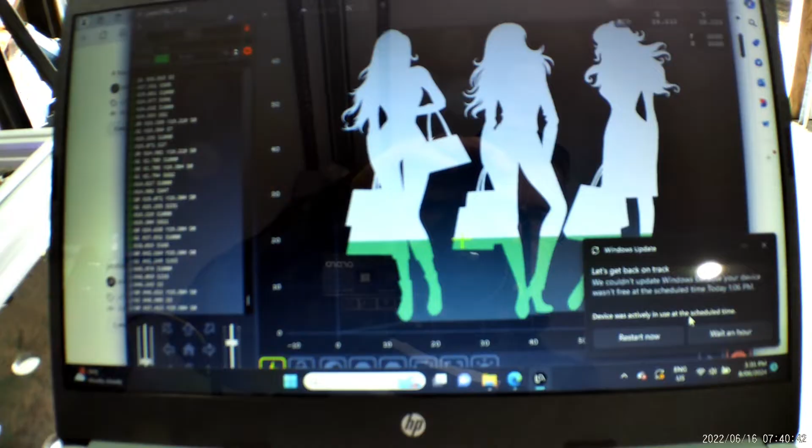It's just printing a picture there now, burning it into a bit of paper. As you can see, it's burning through the paper, but that's working so far. There you go, you can see what it's actually printing down there, that picture there. You can see the green line where it's up to, it's pretty much just finished printing their legs.

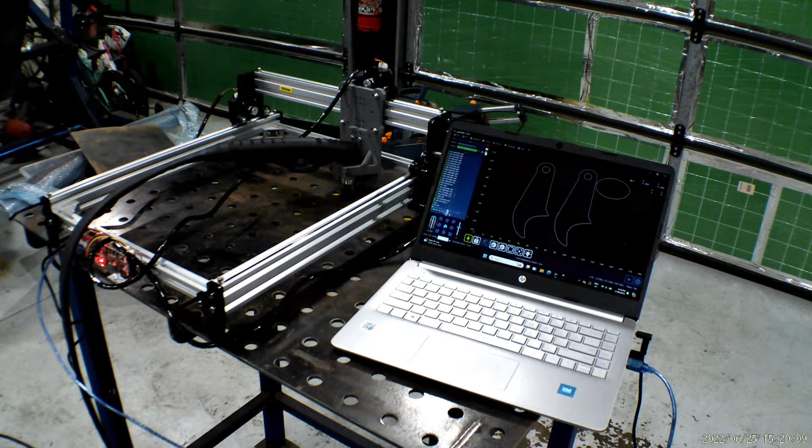So I guess, righto, what we've done here is set up the new bracket arrangement for the plasma attachment to the router, the CNC engraver. What we've done, and I got Nick Rimmer to make it work, he pretty much copied this original bracket which held the laser on, this bracket here, and using his AutoCAD and 3D printing skills, he printed me this thing.

So what this allows me to do is, the old laser, I'll find that here somewhere. The old laser attachment was this, and it used to bolt onto the front of this thing and connect right at the front here, and it shot the laser down to the material you're going to engrave. That's pretty much how it used to fit together.

So what he did was extend it down, so if I want to actually mount that laser down low, I could put this on. I could take this plasma attachment off and mount it down low. He made the mounting bracket for me, which fits onto my x-axis and y-axis. So what he did was, I drew up on here the size I needed for the laser attachment.

And you'll see this thing will start printing what I need it to print now - not printing, start engraving, plasma cutting, but I've got the plasma turned off at the moment, so I'm just trying to get this thing working. I'll turn it off just so I can finish what I was saying, I didn't mean to actually turn it on. Yes, I want to abort that.

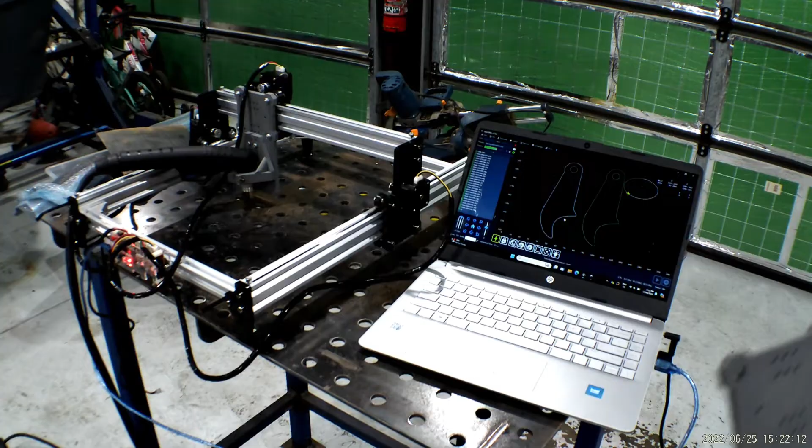So yeah, what it allowed me to do was - I'll just turn this camera around so I can see. That's no good, I'll turn to the back here. So what it allowed me to do was, instead of having the actual laser mounted up high here on a short mounting board, I can mount it down lower.

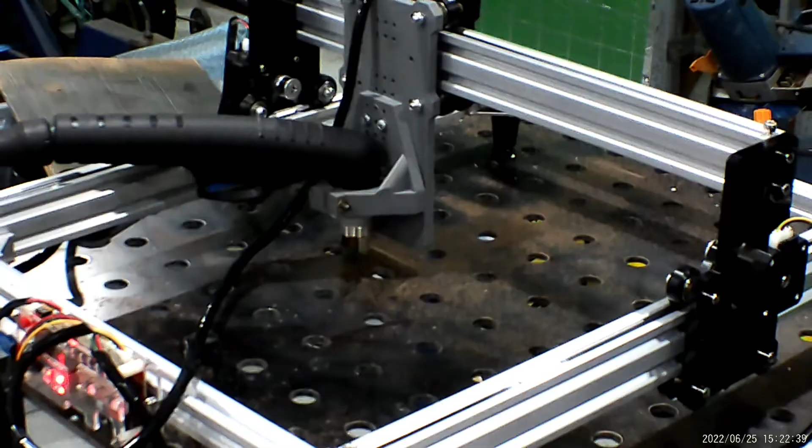But that plasma attachment you can see over there, let me just swing that around. I just drew that up, got him to modify it and make it for me. See that bracket there? It just mounts onto this printed board. This is just a plastic board at the moment, and all we're doing is proving that the concept works. I made this mounting bracket, which has a 32mm hole, which mounts my plasma torch straight into the top of it.

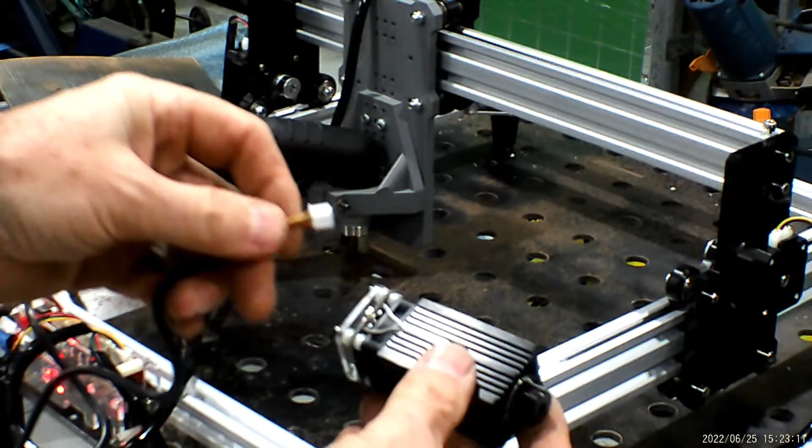And then, like I said, I haven't got the laser attached at the moment. Here's the laser plug, if I plug this into this little laser here, it'll put the laser at the end of it. I don't want to use that laser, all I want is the plasma to run. That's just crossed over at the moment, plug that back in.

So what I'll do now is I'll show you how this actually runs. I'll just bring this around over here somewhere so you can see, you'll be able to see what's on this screen here.

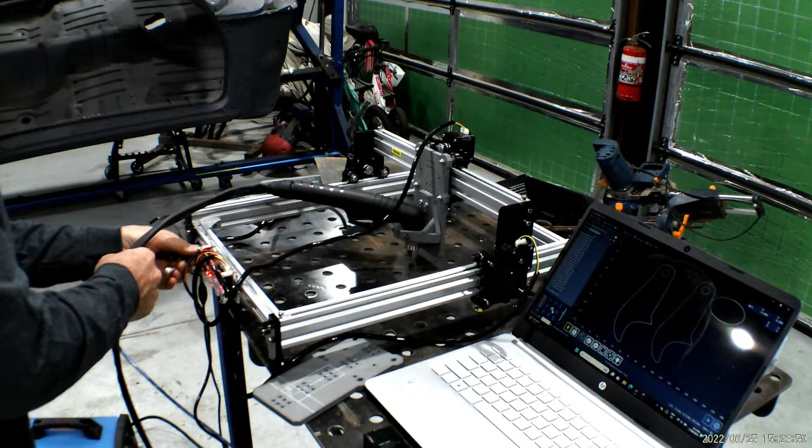I'll stop the job and start it again. Just got to be careful. At the moment I've got nothing holding my plasma torch sort of lead wire up, so I kind of got to hold it here out of the way by hand. So at the moment you can see that job that I've got on the screen there.

Just a couple of brackets I just made up myself there. I forgot to home it down there, so you'll see now it'll actually move out to its right position. It won't get jammed on things that it was getting jammed on before. There you go, it's cut those two holes out first, it's followed that path. And you can see the little cursor down here following around.

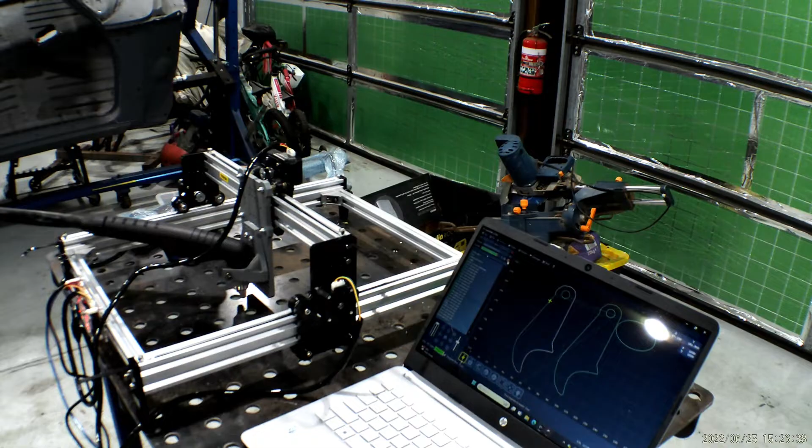So if I can get this thing working with my plasma torch, I've got to get a little catenary made for here, so this cable's out of the way. I've got a little catenary made for the side here to hold these drag cables here. But as you can see, it'll follow the path of a bracket that I want to get made, or a double bracket, like I said, and just a plain hole in the plate.

Hopefully you can see that a bit easier if I take that away. So it's saying now it's cut that, right? What I've got to do next is I've got to work out where this trigger wire goes from the laser down to my plasma torch, which is down here, my plasma cutter.

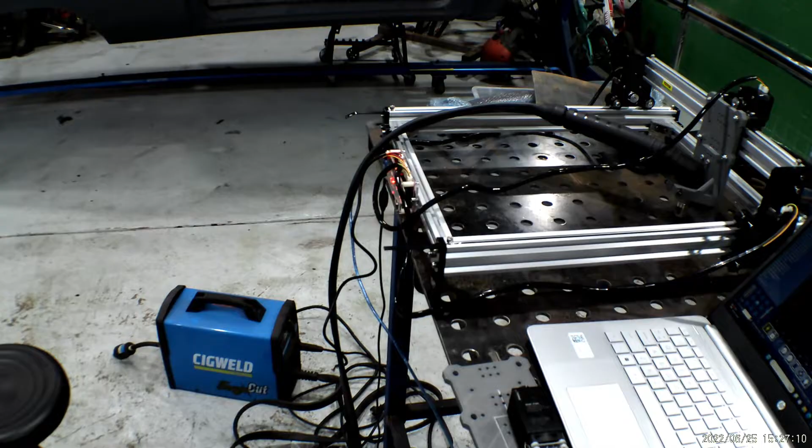It's an easy cut CIGWELD. It's an easy cut 35. So what I've got to do is I've got to work out how to disconnect this end.

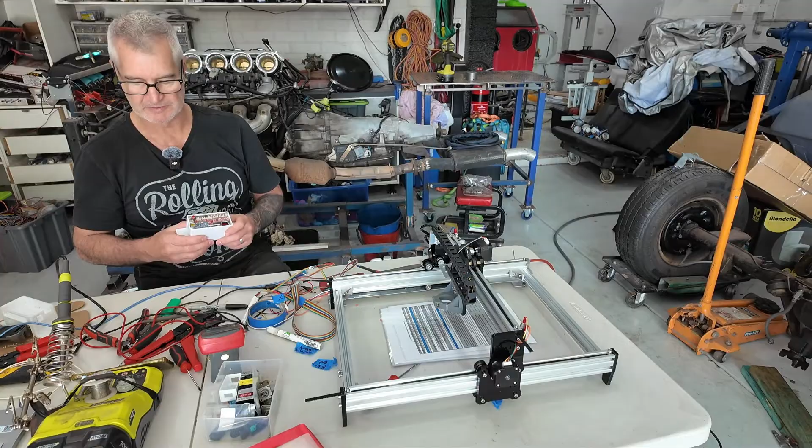As I described previously, we've got a small CNC laser engraver. What we did was I took off the laser attachment and I had a bracket made up to hold my plasma torch, fitted a small catenary to it. I'll show you that in a second. Hopefully I can get that to move over there. I'll do that in a sec. Let me just see if I can make this fit there. There you go, there's the small CNC plasma cutter we've made up.

What we did was we fitted these catenaries on here, so you can see as it runs now, the little catenary runs around with the little cable chain, runs around with all the wires in it. Same on the long travel, so you can see the long travel moves back and forward here.

So what I've done here is I've extended the cable from my plasma torch, or plasma cutter. This is the original plug that used to go to the laser. So when this little computer used to trigger the laser, it used to turn this on and power it up. So I'll plug that back in there.

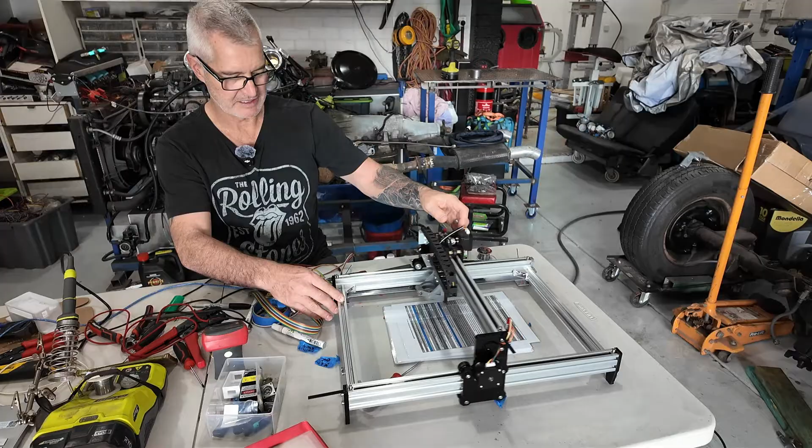I have this plug here, which is all my limits that I have on here. So each one of these axes has a limit on it, on the X and Y axis, on the long travel or cross travel, whatever you want to call it. So this runs down to the end here, you'll hear it hit the limit. Hopefully you hear that click off. Same the other end, and now they're a hard limit.

So there's a certain parameter you have to set up so this thing knows the size of the table that it's cutting, and the hard limit is there as a safety factor. So if it runs too far, it actually hits it and trips it out.

So I just need to plug in all these, these are the stepper motor drives. So there's 3 stepper motors on this. There's 2 long travel or Y-axis, and there's 1 cross or X-axis on here. So I'll just plug these into where they've got to go. Hopefully they're all the same plug. I marked them, so hopefully I've got this one marked as X. So hopefully they're all correct. Plug the limits in.

So there's the limits plugged in there as well. I use this ribbon cable - had one of the guys I know fit the plug up to me with the ribbon cable, and then I just spliced off as much as I needed on the end of it here. I could have cut it a bit shorter, and probably will. I'll cut them in and tee them in right next to the catenary or cable vey when I get some time. But for now, I've just soldered all the joints in here to make it right.

This also has a power supply which plugs in the side here, which comes from 240 volt mains, and it has the little connector that comes from the laptop. So that's that part - I'll turn the power on.

Logged in there, and what I'm currently using is laser GRBL, which came with this small Vivo brand laser cutter. At the moment, what I'm going to do is power this laser up.

I'll power this machine up and do a test cut on it. So I'm going to load up a file here - it's just a small bracket file that I made up. It says create, so it turns it into a G-code file, and the picture's up on the screen there.

I turn on my plasma cutter. That's on. At the moment, the plasma torch is just sitting here - not 100% sure just yet, but I think because this is a high-frequency pilot arc plasma cutter, at the moment I've disabled the trigger.

This cable here runs into the back of my plasma cutter down there, and I'll show you what I've done. It runs down - I drilled a hole in the back of the plasma cutter, put a 4-pin connector on the back of the box, and what I did was I wired in one of these little relays.

The signal that used to come out of this cable here used to go into the laser. Now it has DC active, DC plus, DC minus, DC active or neutral, and the trigger wire, which is the signal wire. So those 3 wires you can see here - black, red, and yellow - we've got red as the DC, black as DC minus or negative, and the yellow cable is the signal.

Righto, let's give this thing a bit of a test hit, see what it does. Start from the beginning. Stay over there, Han. Stay over that side.

I tripped the power out, I tripped the circuit breaker. Okay, so I tripped the power on me. I had the plasma cutter plugged into the power board and it tripped it out, so now it's plugged straight into the mains. Let's see if I can make this resume cutting, or if I have to start again.

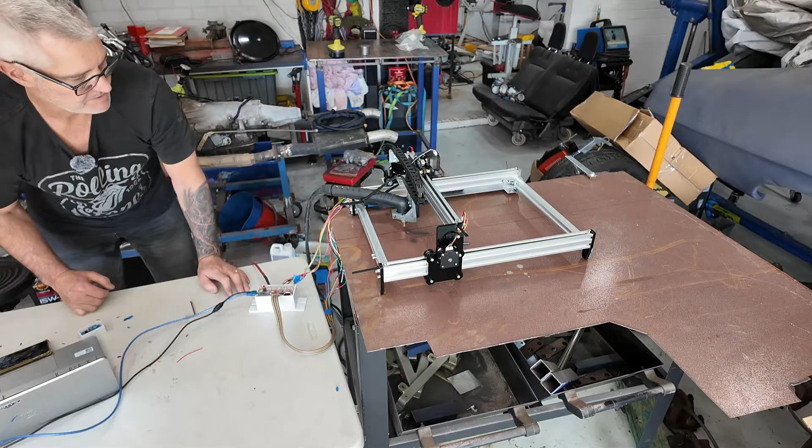Alright, what happened then was I stopped it, because what happened was it hit the side here and it moved the torch up away from the steel. I broke the plasma bracket here. I don't know if you can see it in there. The bracket right there snapped.

I over tightened the screw, so I'm trying to hold it in position just for this test run with this cable tie holding it up. I'll see if I can send this thing home again. Home is supposed to be over here. Let's see if we can make it do it again. I've got the original cut still in the middle there, I'm going to leave them there. Let's see if we can make this thing cut once more.

Start from the beginning. Alright, let's see how we go this time. That's too high. Oops, that's too high. Here we go.

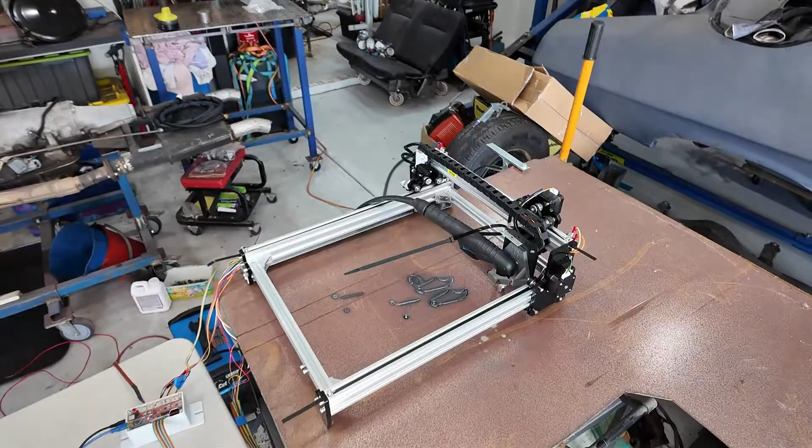That looks pretty good. I'll bring the camera down, I'll show you what it actually cut. So if you have a look there, that's what it cut. They cut pretty neat. There's a bit of dross around, and you can see there's a bit of an issue there with the start-stop sequence where it starts and doesn't continue to cut past it, but I'll work that out in the programming.

But as you can see, that's a $160 CNC laser engraver. I already had the plasma cutter, so if you have a plasma cutter, you don't have to pay the extra money. It's probably, I would say, maybe $3 or $4 for the limits. There's 1, 2, 3, 4 limits on there.

I bought these cable tracks on eBay, 2 of them, each 1 metre long - there's heaps spare. Got them for like $6 each. There's a piece of aluminium to guide it along, just a bit of offset unequal angle aluminium. I made a track down the side for the cable conveyor to sit in. This one sits up high so it doesn't sag, because if you put them upside down, they do this. Cheap as chips, simple process.

That was just some little bodgy thing I made up to try and make it cut. I'll see if I can pull one of those pieces out, if it's not too hot, see if they come out. No, they're not too hot. There you go - this is pretty thin plate.

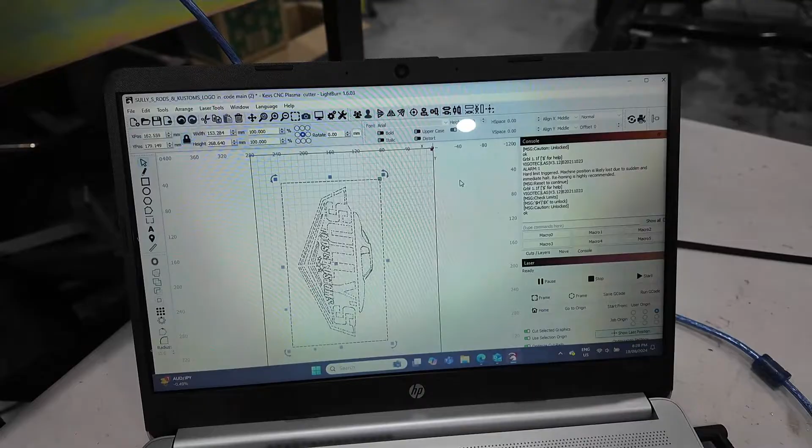So this is what it looks like in LightBurn. You can see my logo there. It's sort of flipped sideways to best fit on the page.

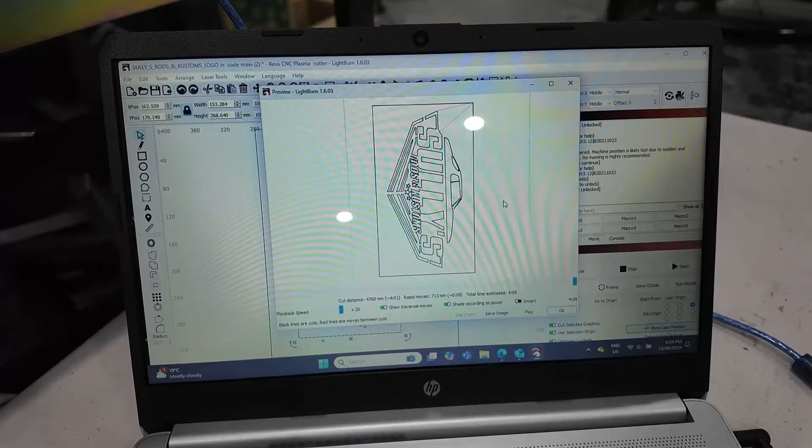If I click this button at the top here, you'll see it'll bring up a play mode of what I'm going to cut. You should be able to see what it's actually doing there. That's the speed it would cut the logo. If I ran it, that's 5 times speed.

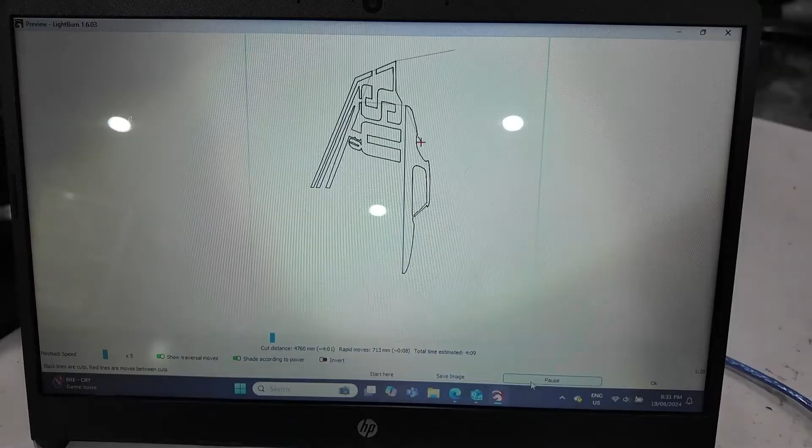Let's just see how it's going there. There you go, it's done the car. It's doing the Sully's part there. Now designing it isn't exactly easy because you've got to design it so the parts don't fall out when you cut them.

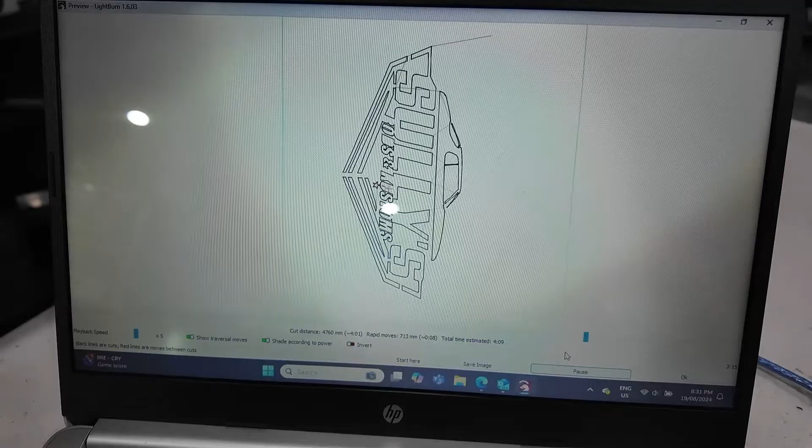I don't know if I've done it right yet until I get a real clean cut. You see now it's just doing the last couple of details, doing the outline cut. And it comes back to the start, and when it gets to there, it's finished.

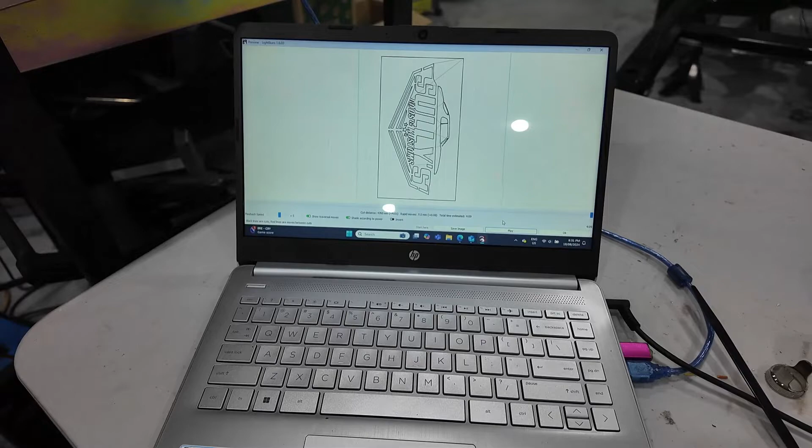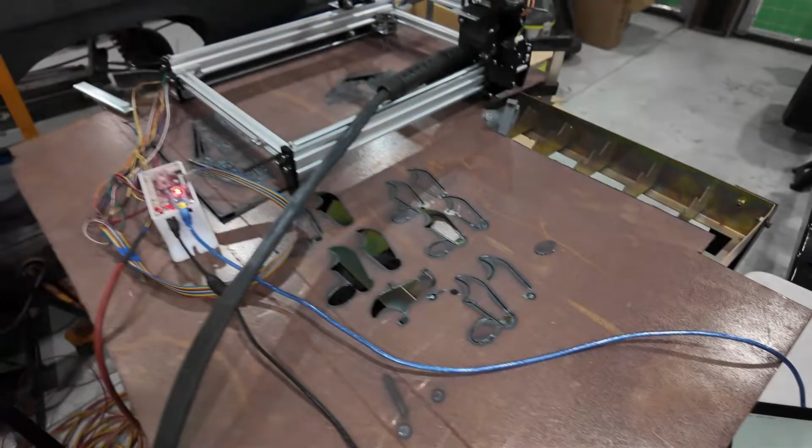And at that point, the piece should just fall out, and all these details technically should fall out of it, and it should leave an outline of what's there. But like I showed you before, the cuts we've been doing...

That's what it currently looks like, right? That's the logo. See if I turn it around, you can get the right - hopefully it doesn't make you seasick looking at it there - but that's what it looks like from above.

You can see here where it chopped off the edge, where it jammed the torch on a bit of this distortion, and then the torch jumped, or the tracks jumped a couple of teeth.

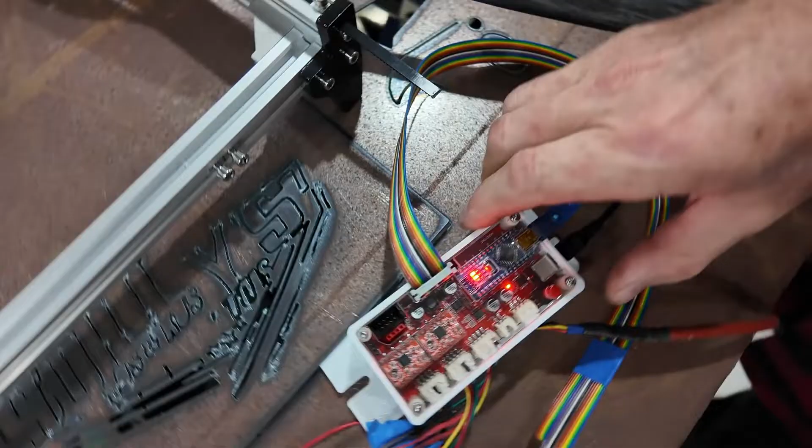But you can see it's trying to cut out the pieces. These pieces are loose here, they'll all drop out. You can see down here the other one I was cutting, which is still stuck under the side of the frame here. But it was really trying to do a cut.

If those bits of slag and stuff and all this distortion didn't happen, I think I'm on a winner. So those cuts are really clean. This thing does a really nice cut.

I don't know if it's all about the little frame there, or if it's my actual plasma cutter. This is a, what is this? It's a SIG Weld Cut 35, I think it is. So it's not made for heavy plate, it's only made for like 10 or 12 millimeter plate.

And yeah, so I think we're really on a winner with this thing, for $165 or $170 for that frame there, and a couple of teething issues.

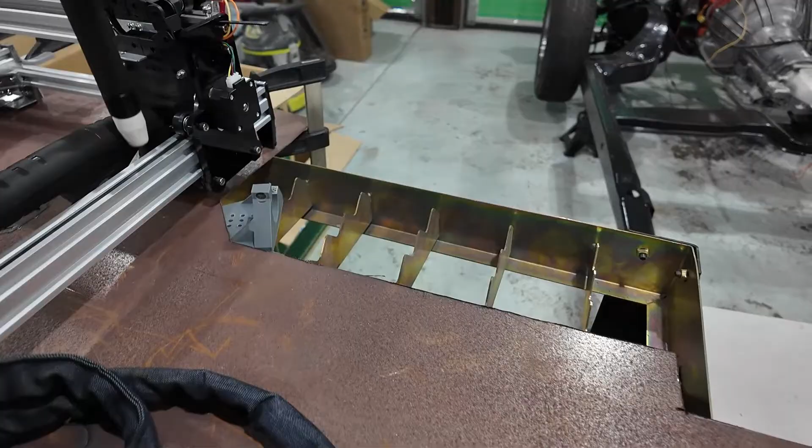Once I get this torch sorted, I have a vertical, or what do you call it, a machine torch ready for it. So it'll be a vertical torch mounted in there, it'll get mounted in a bracket. I don't have to worry about cable management as much then.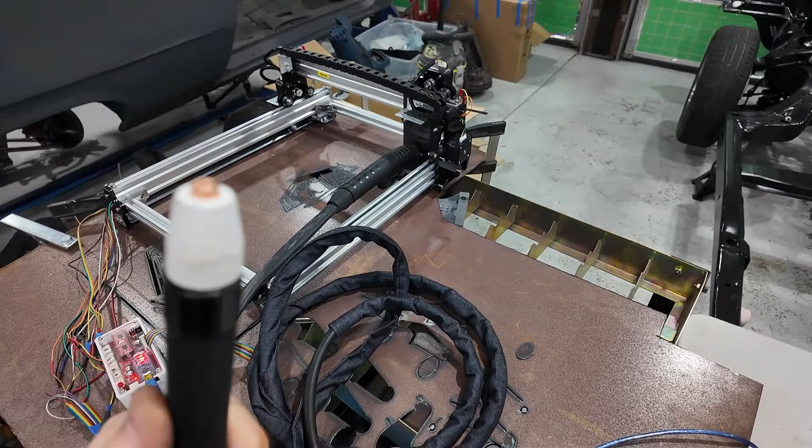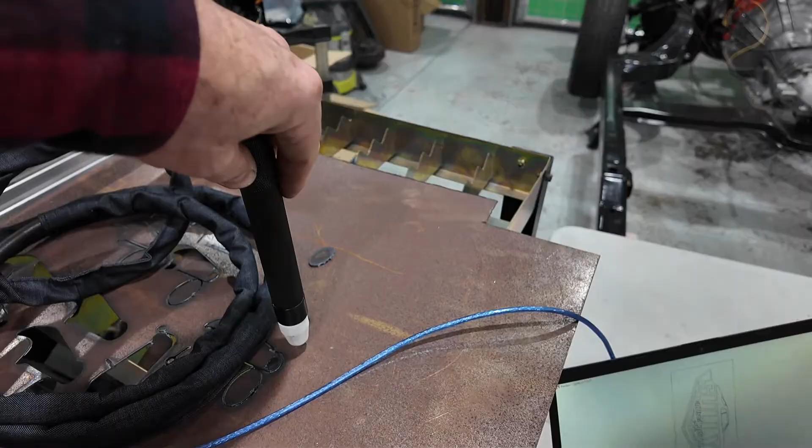Once I get that sorted - I actually bought the wrong one. This torch is not designed for that actual plasma cutter. This is a pilot arc plasma cutter, and this one actually has to touch metal to take the arc, and then it's supposed to raise up. But I don't have a Z axis on this thing.

I just have the X and Y axis, and you can see it moves quite freely. It knows when it's going to hit a limit, you'll hear it clicking on its limits there. Same on the X and Y axis, it'll hit the X and Y axis limits.

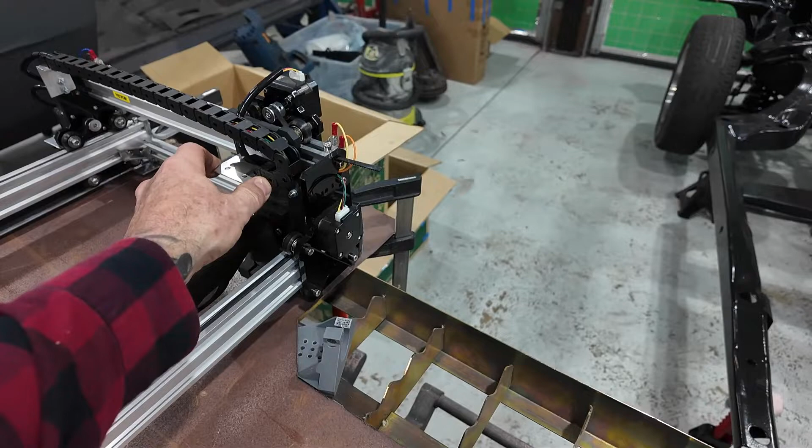You can see how the little catenary that holds the cables scrolls along there, and the other one on the other side I've showed you before. So simple little process, very cheap little plasma cutter. It'll do the job, it'll definitely cut what I need.

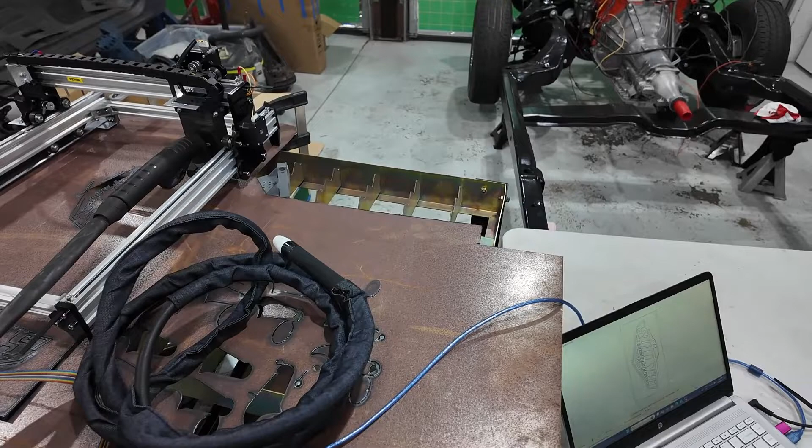I just need to work out a way to stop this distortion. And like I said, get a new bit of plate tomorrow. I have to stop at the steel store on the way home and buy something. I might even get them cut to the actual table size that I've got here. That might actually help me with my issues of distortion without it sitting on the edge. And we'll go from there.